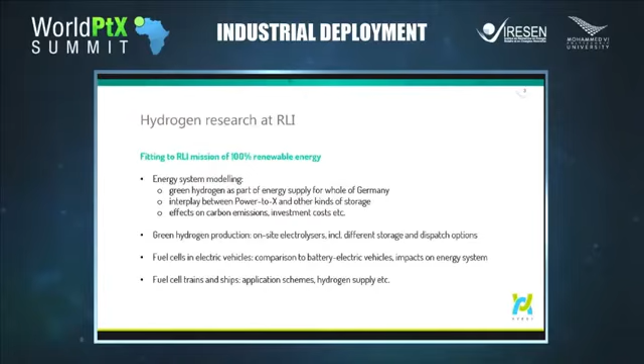Green hydrogen production, though, is also something else. It's also to look at the on-site electrolyzer, its different dispatch options, and so on. And we have a focus on hydrogen and Power-to-X in the transport sector. So for example, we're comparing battery electric vehicles and their impact on the energy system to what you would do with a fuel cell vehicle.

And then the fuel cell vehicle is not the only transport option we look into. We've also conducted a few projects with fuel cell trains and ships. And this can be a study and it can be an application depending on the degree of readiness. For example, when you look at fuel cell trains, the readiness level is very different from the one when you look at ships, for example.

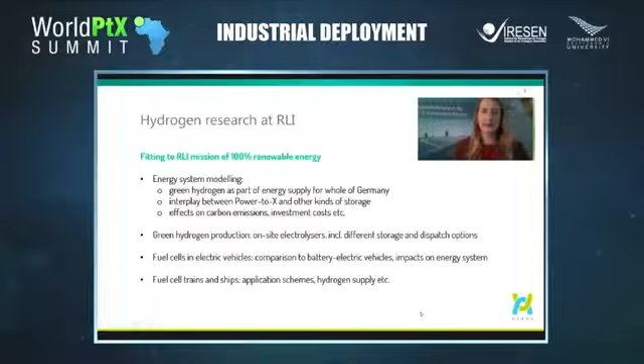This is something that I'd like to show you because it shows you a little bit of the discussion that we've had in Germany over the last few years. So for the Federal Ministry of Transport in Germany, we're working on a location tool for the whole of Germany, and we're trying to facilitate the transformation of the transport sector. In our case, our job is to look into hydrogen and alternatives to natural gas, but our partners are looking into what could be the best location for the charging infrastructure of the future.

And it shows you that when we're looking into alternative transport, hydrogen is playing a part in this area in Germany. We're not only looking into battery electric vehicles, but also into hydrogen.

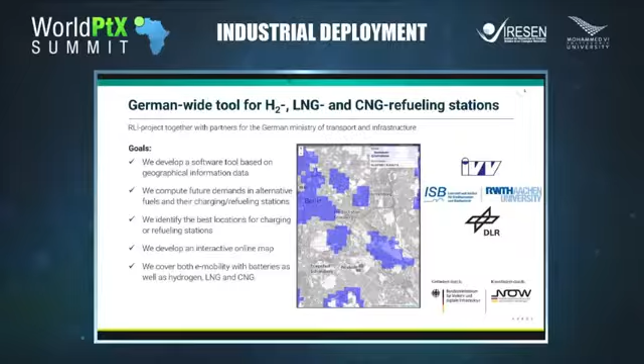And one of the first projects that we did is in a way a famous project because it is related to this famous new airport in Berlin that we've had. Well, we've been building it for a very long time. You might have heard the news about it. It was supposed to go online almost 10 years ago. And now finally, this year, amid the Corona crisis, we have opened a new airport in Berlin.

Several years ago, RLI was already supplying, together with partners, this airport with hydrogen, and this was on-site electrolyzer-based hydrogen. The idea at the time was the new airport will probably need a new public transport line. Why not give it a hydrogen bus to supply the airport line? So we were setting up at a gas station that Total owns. We were setting up a new kind of electrolyzer.

And the idea was that the new airport is situated in Brandenburg, which is a federal state with a very high share of renewable energy. And this could be a predecessor for new projects where you take on-site electricity generated from renewables and then feed it into, for example, a well-running gas station like this one.

As you can imagine, this one, as it came online, practically the hydrogen part at least, had to go offline for another few years because it wasn't a very well-used hydrogen supply station at the time. But I'm lucky to tell you that now finally, since the airport is online, I think we're going a great step from this one.

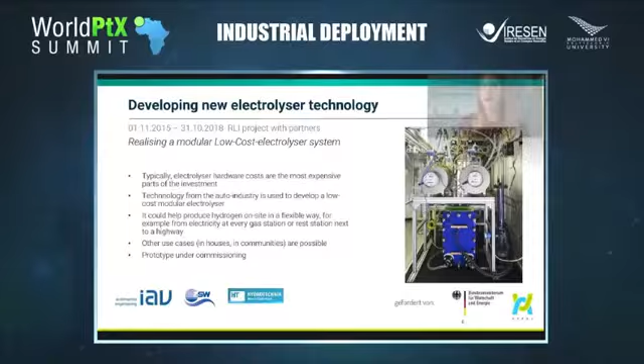And since this is about scale-up of technology, I've also taken this example that I wanted to show you because we've also actually developed new electrolyzer technology. And the idea behind the project that we did here was, obviously, if we're honest, electrolyzer hardware costs are always and still the most expensive part of the investment, right? So is there any way to drive these costs down? And at the time we were thinking, can we work together with the automotive industry? Because you know that the automotive industry in Germany is extremely strong, extremely efficient.

And we were thinking, is there, let's say, a processing or a production knowledge that we can use from this industry to maybe produce a new electrolyzer that we can scale up in such a way that we can help all these industrial deployment issues at some point in the future.

And we've developed a prototype which comes as a very, very small scale electrolyzer. And we were thinking, you know, this could be great for basically setting it up in small remote situations. This could be an off-grid site, for example, or you could plug them together and make them modular.

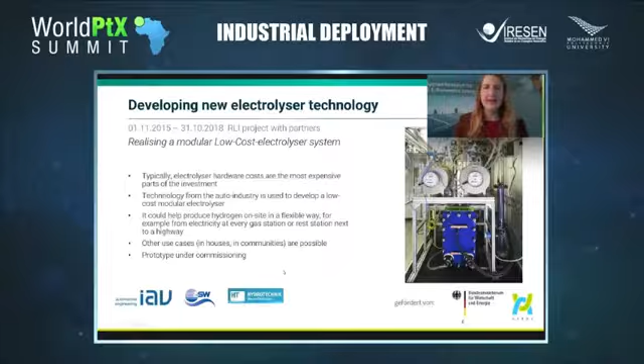And since I'm also representing Hypos, this is something that you should know about the network that we're in. So Hypos is the Hydrogen Power Storage and Solutions network in the region that I'm going to show you on my next slide. The idea is that we're combining the knowledge and also the mission of more than 120 members in Germany, but also abroad, working on a green hydrogen economy.

We're very keen on the green part, and I can explain to you why that is. Generally, the idea is that the whole value chain should be part of the transformation of the hydrogen economy. So for example, we're looking at the production, and I'm talking renewable electricity production, I'm not only talking hydrogen production. We're starting at the renewable energy. And then we're looking at production, storage, transportation, and utilization.

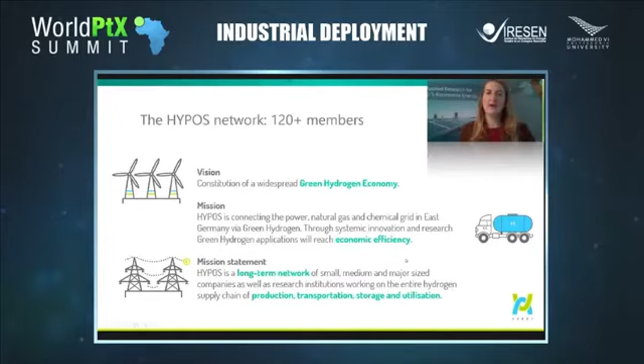Why is Hypos especially well situated to do this? Well, this is a map of Germany. You've probably seen it before. In the area that is highlighted on the east, this is more the area that Hypos is active in. And it's an area that is very famous for its chemical industry.

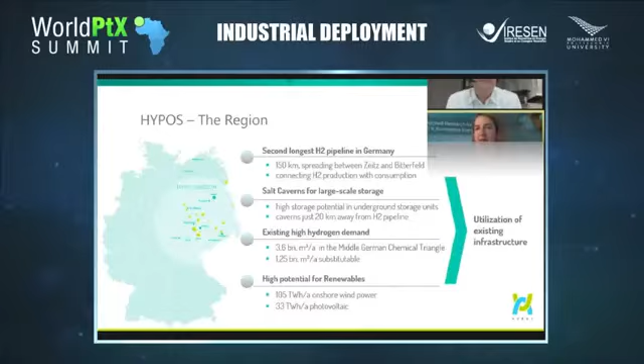It has a long history of chemical industry in the area, and it also has one of the longest H2 pipelines that we have in Germany. It's not like it's a country full of hydrogen pipelines, but we have one dedicated hydrogen pipeline in this area, and it supplies some of these chemical industry sites that I've just mentioned.

And what's also interesting to know about this region is that the supply of renewable energy already, but also in the future, will be massive because it's prone to a lot of wind and so on. And it's also not a densely populated area with a lot of industrial production. So there is going to be a surplus of green electricity coming up in the future in this area. And we're thinking it will be a great synergy to turn this into green hydrogen and use it in the industries that are here.

We're looking, as I said, at all the different phases of the value chain. And what's interesting is that we're looking into large-scale storage. So we're not only thinking decentralized small scale or putting it on a truck, but we've developed a few projects with a natural gas network operator, tapping into their storage facilities, into the caverns, and looking at what hydrogen will do to these storage options.

And then when it comes to the utilization of hydrogen, from my German perspective, I am open to all these different kinds of deployment methods. I can see hydrogen coming up in the transport sector, as well as the chemical industry, the industry in general, energy supply, and so on. And I think we should talk a little more later of maybe how you would see this in Germany or in other countries. What are the areas or energy sectors where we're actually going to be using hydrogen first? I look forward to your opinions on this.

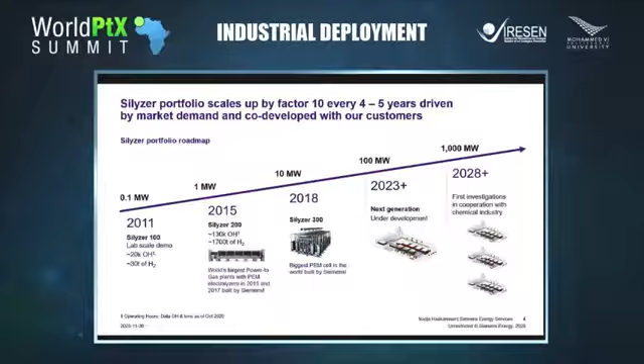So we are really focusing on making the existing conventional technology future-proof, future-ready. The ultimate goal is that they will be able to run on 100% hydrogen, so really ready with our technology for the hydrogen economy.

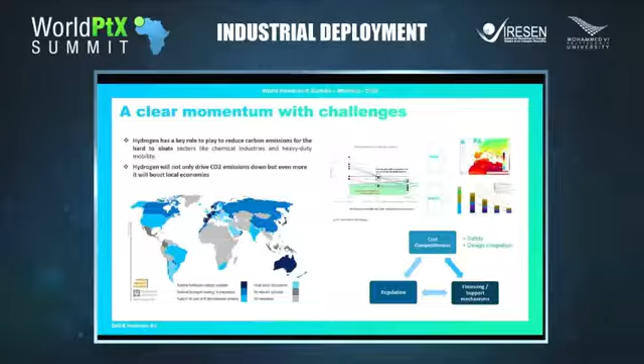So what we see here is really a rapid structuration of the market to reach those ambitions. What do we do at ENGIE? Here you see a slide. It's a bit of a collector slide, as it dates back from 2016.

The good news is that now everybody is sharing this vision of producing in very good regions, having local offtake, with industry, mining, heavy mobility, and then at a later stage, exporting this renewable energy to locations worldwide where there will be a lack of this renewable hydrogen. ENGIE is really putting this vision into action with a portfolio of 3 gigawatts of industrial scale projects in more than 10 different countries worldwide, across different sectors, as you can see.

Now, concretely on what scale-ups require and what are the key lessons learned, ENGIE is willing to share from this pipeline of development. We have 5 of them, and we can take them in different order. For us, what is essential is having offtake, building the offtake. That's really the basis of how we think we can trigger this scaling up.

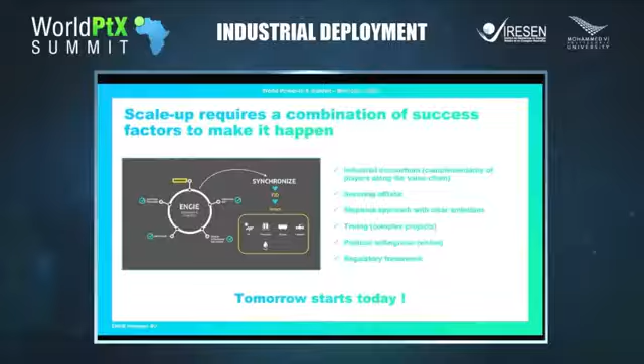And the last word: tomorrow starts today. So let's build up those consortiums to make it happen.

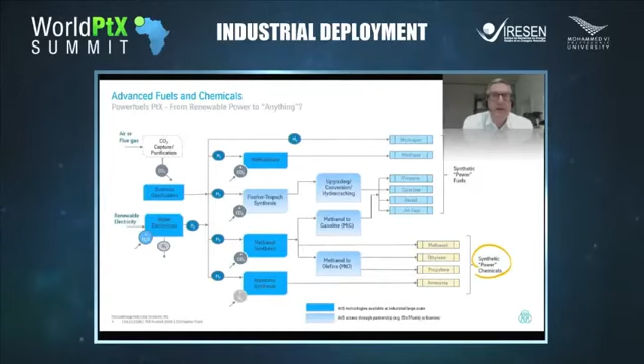So let's say the technical possibilities to implement a national strategy to convert industries into a green industry are to a very large extent all given already. It's no rocket science any longer. It can be built, and it can be built even on a lump sum turnkey basis if wanted. Why am I saying lump sum turnkey or EPC? Because at the end of the day, it's necessary to finance such projects. And we've learned earlier that yes, the competitiveness is clear. It needs to be competitive, otherwise no one will invest.

And that is something which I think the governments, the lawmakers really have to focus on. That they set up legislation that permits investment into such technologies. That trade of energy coming from either pure hydrogen or chemicals as an energy carrier or as a regular commodity product is not prohibited or full of obstacles, but is as easy as possible, so that no further costs are being added. That there's fair competition, meaning that some producers continuing to pollute the atmosphere don't have advantages over non-polluting production technologies.

All these aspects are, of course, sensitive elements, and they affect a lot of different societies and countries and governments. And I think the most tricky part has been successfully passed already. That was the Paris Treaty. And if we then, at the end of the day, would come to, let's say, a globally aligned legislation framework, which is transparent and provides guidance to the investors. Sometimes it's very complicated to apply for, let's say, initial upfront financing or governmental support. It is a nightmare to apply for that for regular investors.

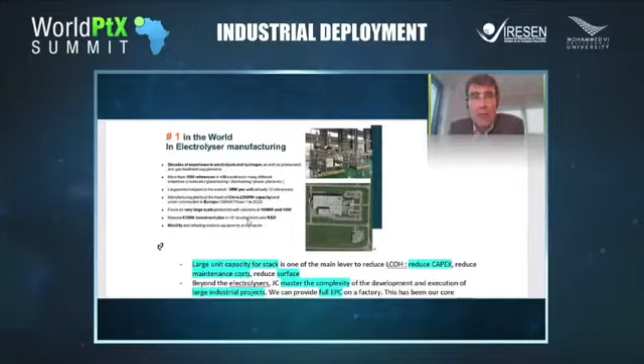We have just announced an investment plan of 100 million euro to accelerate our development in hydrogen. So this is R&D, this is new manufacturing capacity, among other in Europe, and this is developing new product lines of equipment. And finally, we are also active in the hydrogen mobility with hydrogen refueling station equipment. On the right here, you see a picture of our future hydrogen electrolyzer plant in France.

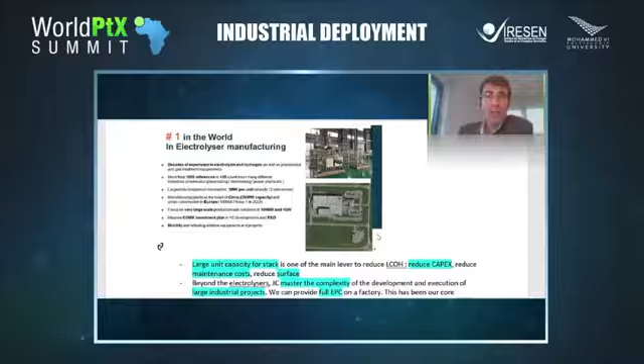We also perform maintenance, major shutdowns of power plants in Morocco, but also beyond. We have a large workshop in Morocco where we manufacture fairly complex equipment, such as gates for locks, such as fans for very large factories, and the likes. And then to close, John Cockerill is very active with a range of energy players active in Morocco.

We are working with major organizations in Morocco on renewable R&D as well as industrial projects, of course in the solar industry, but also more and more in the hydrogen industry. And in fact, we have already sold our first electrolyzer, an electrolyzer of 500 kilowatts to a client in Morocco. And with this, I will stop my presentation.

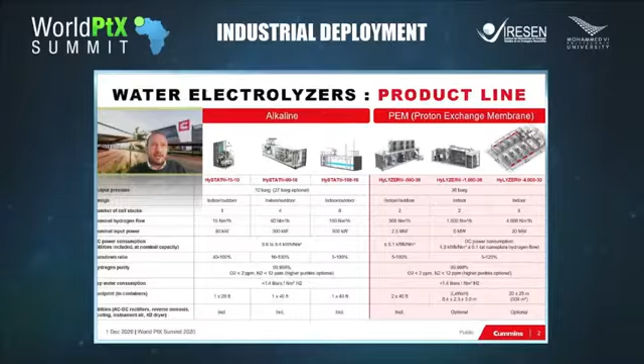I will not go through presenting all the products, but I think it is probably interesting also for the participants to this webinar to see what is available today. On our side, we are active on both alkaline and PEM technologies. Our alkaline is very well suited for small-scale industrial applications, typically for clients in the float glass industry, but also in the field of oil and fat hydrogenation, but also in power plants. And we have a number of references in North Africa, in power plants, and also in Morocco.

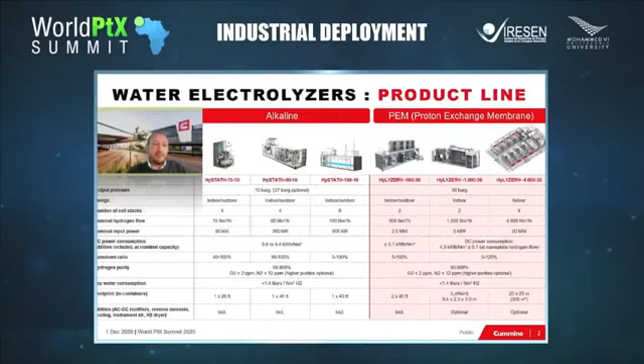But the main focus for us when we speak about Power-to-X applications is the PEM technology, on which we have spent quite a lot of effort because we believe it is the future of electrolysis technologies. And for us, the key feature of what the market needs in terms of electrolysis is, first of all, a product with the highest safety standard, a product that can cope with a very dynamic operation profile to be combined with renewable power, such as wind and solar mainly, which are the ones that are going to be used mainly for Power-to-X applications.

Efficiency is clearly an important element to make sure that we maximize the amount of hydrogen produced for every megawatt hour of electricity being used by the unit. Obviously, cost of the technology and durability will be key to ensure the low cost of the hydrogen being produced. We should not underestimate also the question about pressure. We think that there is an interest to have technologies that can deliver a high pressure directly at the outlet of the electrolyzer.

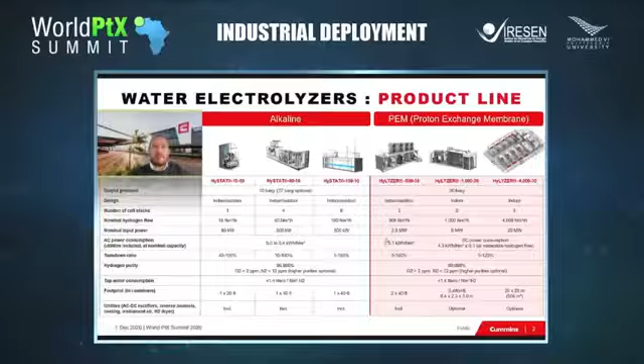And also the footprint is something that matters, probably less in Morocco because you have quite a lot of space, but especially when we are targeting industrial applications, we need to make sure that we maximize every square meter. So on our side, I will just briefly explain what we see in terms of products and the way forward to larger applications.

So today, the core of the technology is the stack, and that's where the electrolysis reaction will take place, where the electricity will split water into hydrogen and oxygen. What you see is the most compact system that you can find today. And we've started to deploy this technology in 2014 in a number of Power-to-X demonstration projects in Europe and also in North America. So you see that here the cells are placed horizontally in the system, and this unit has an input power of 1.25 megawatts of electricity and can deliver something like 25 kilograms of hydrogen per hour.

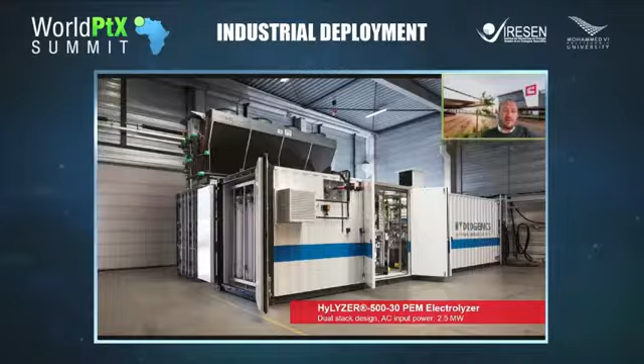When you integrate this into a complete product, actually including all the transformers to go from medium voltage to low voltage, but also the rectification of power from AC to DC, the water purification system, but also the cooling. We need cooling in electrolyzer technologies, and also a hydrogen purification system. Then you see the type of solution that you can actually get on the market today. For this size of application, it's mainly containerized systems that you can find on the market.

But when we speak about large-scale Power-to-X applications, for us, the keywords are integration, standardization, scalability, and modularity. So what we've been doing on our side was to make an upscaling of the stack that I've just presented before, and to move to stacks with an individual input power of 2.5 megawatts. And we integrate this into this type of product, which is called the HyLYZER-1000, where you get two stacks actually producing the hydrogen and injecting the hydrogen in this balance of stack. And then you see that the technology is extremely modular. And here you see a rendering of a 20 megawatt system with 4 units of 5 megawatts each.

And what you see here is typically the scope that we see for a company like us, while for the rest of the utilities, we see a key to partner with local EPC companies that can bring the local knowledge and also that can help us to reduce the cost of those technologies. Our focus has been on the core components, especially the electrolyzer technology.

In our philosophy, let's say bigger is cheaper. So each time we can actually increase the size of an individual element, it will have a positive impact on the cost of the technology. And this is also valid for the scale of the project. So clearly there is a move towards 100 megawatts plus type of project. This will really help all of us to bring the cost down of the technology because this is key to

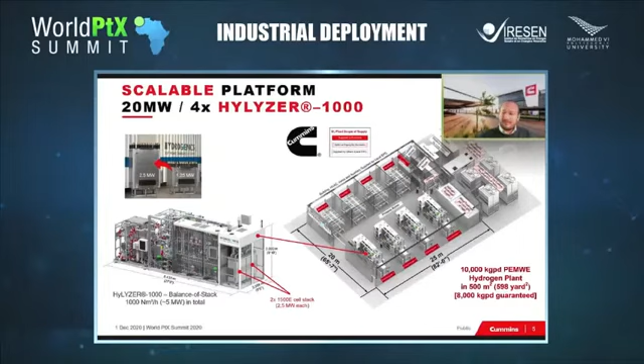ensure the success. So today, this 20 megawatts system, actually we are building it. It's in the final stage of the commissioning in a project in Canada. With Air Liquide as a client, the hydrogen will be liquefied and sent to industrial clients by trucks. It is a commercial application, and it will be inaugurated in the beginning of next year.

And maybe to conclude my presentation, I would like to stress the most important challenges that we see. It has been already mentioned, but the policy framework will be key to address adequately the cost gap between the hydrogen which is being produced today from renewable power and electrolysis in comparison to the hydrogen being produced today from natural gas, because it is still more expensive. And so we need to work on this together with policymakers to create a demand for renewable hydrogen and make sure that we can compete with natural gas.

And last but not least, standardization for us is really key, not only at our scale, but also among the different suppliers to make sure that we can reduce the cost of the technology. So we are very keen to see the interest and the developments on the topic of Power-to-X in Morocco and in the rest of the world.